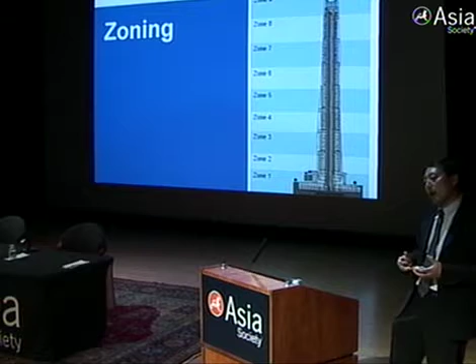So the building is divided into 9 zones. Zone 1 is the lobbies, the hotel functions, the public amenities, retail. Zones 2 to 6 are the office floors, and each zone will have a different kind of floor plate size to fit different tenant needs. Some tenants probably need a big floor plate, ranging from 4,500 square meters down to 2,000 square meters. So we have different conditioned floor plate zones for different tenants.

Zone 7 and zone 8 will be the hotel, with the hotel lobby in the middle. Above will be luxury hotel suites, below will be luxury business hotel suites. The top, zone 9, will be exhibition space and observation space, also containing wind turbines for wind engineering elements.

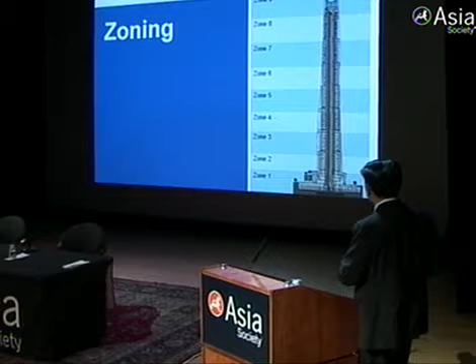So the program includes conference and retail, office, hotel, observation, and boutique offices. We preserve some of the office suites on top as potential exchange space or showcase space for top Chinese companies, as a place for them to engage the world and meet people from around the world, show their business, and make very important relationships. In China, making private relationships, clubs, all that stuff is very important as a business function, but it can also be very public, serving as a company's window engaging with society as well.

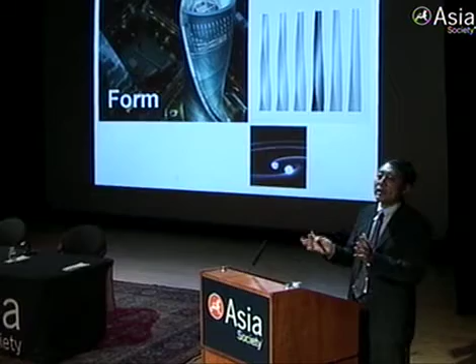Again, go back to the form. I talk about the form we talk about from an urban design context. We said there's three buildings working together. So this building being the very futuristic looking in a spiral. Three buildings together, the building spirals 120 degrees, which is exactly 1/3 of a circle. So it's actually a metaphor about harmonizing three buildings together as a triangle relationship.

But everything works not only as a metaphor, for a symbolic reason, but also for a very important engineering reason. For a tall building like that, wind engineering is the most important thing. And the architecture form needs to work with the force of nature.

It's very important. So we studied the spiral from 90 degrees, 110 degrees, 120 degrees, 130 degrees, 150 degrees, and 180 degrees. In the process, we studied different rotations in the spiral and put them into wind tunnel testing to see how the spiral shape will affect the wind engineering. The result tells us the more spiral helps reduce wind resistance.

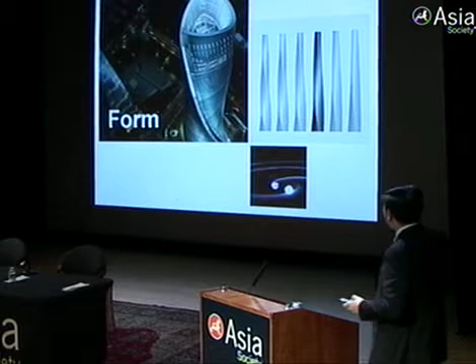So it actually helps our structure system much better, helps my friend Dennis much better here. But also, we want the form itself to make sense with the functional space inside, so it's very efficient, makes the internal space work, and doesn't look like too much movement. So it's a very subtle, elegant shape. Eventually, what we picked is 120 degrees.

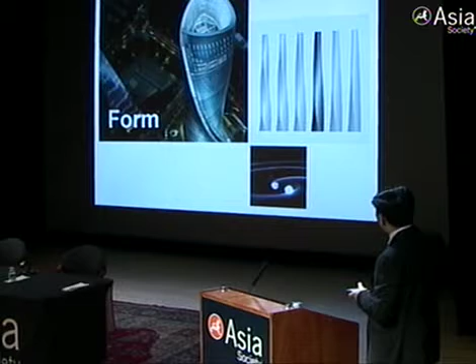We go back to the big story. We said that this form is futuristic because the spiral shape, from the physical standpoint, goes from the smallest things in our nature, the electron, to the biggest thing, our universe. Our existence is surrounded by the spiral nature of a spiral. So that's why we think the form represents the future and nature as well.

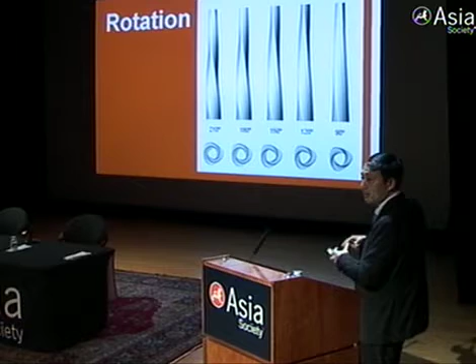So the rotation, 90, 120, 150, 180. So the 120 degree spiral is about 1/3 of a circle. Actually, it completes the three-building-together relationship. We think it works very nicely.

And the other thing we did is scaling. Our curtain wall is a very challenging design because the glass form not only rotates, but also tapers up above. So it tapers and rotates at the same time. We have a very big challenge designing a curtain wall system because the glass needs to be very uniform and also practical to make the glass work.

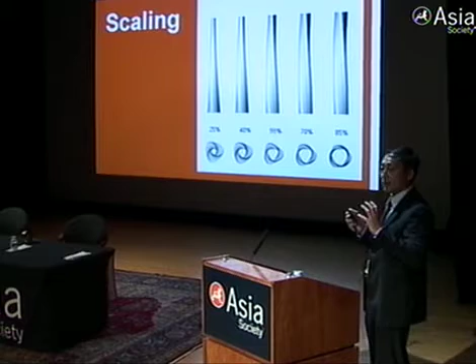Both the spiral rotation and the scaling help the wind engineering. We studied the form with our scaled spiral and rotation shape compared to a regular rectangular tapering box. Let's say if we take a John Hancock building form and project it to 600 meters tall, our form will reduce about 24% of wind resistance from a structural load.

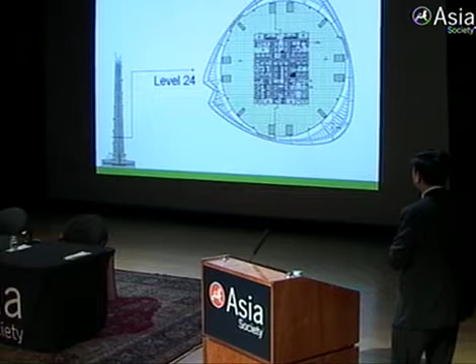The client, although owned by government, was very demanding on us to create a very efficient, great business. So doing a tall building is not only for the aspiration of being tall, but also needs to be efficient as a business. It needs to be a very efficient floor plate. It needs to be good business.

So on the 118th level is our luxury hotel suites. The hotel lobby is on the 110th floor. Down here there will be a spa and restaurants. Here will be our reception lobbies, cafeterias, and the club lounge area.

According to Chinese architecture code, every 15 floors you have to have a refuge area temporarily for people, in case of emergency or fire, to stay while the fire is being dealt with. So every 15 floors we have a sky lobby, and below that a refuge floor, structure floors, and mechanical floors.

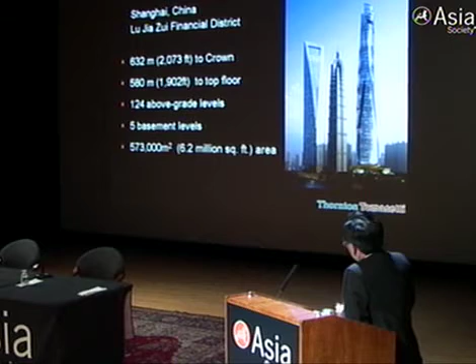With this in mind, you understand this building has a tapering form - how do we make it simple? And the building is twisting, so we can't do formwork twisting. So working with Sergeant and his team for months and months, we came up with tricks and ideas for how to keep the structure simple and fulfill the requirements.

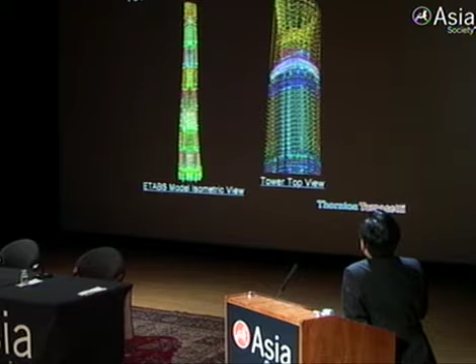I'll go on further to show you another one. Okay, the gravity system - now this is our computer model of the entire structure, including the curtain wall support structure above. Now I'll give you a short movie. We should have some music, right?

You can see that this is the perimeter grid that supports the glass curtain wall, which is hung almost every 14 floors in each zone. We have an atrium space in between each zone, called the sky lobby. And this is the mechanical floor. They have a full triangular plate size that will extend to the full perimeter.

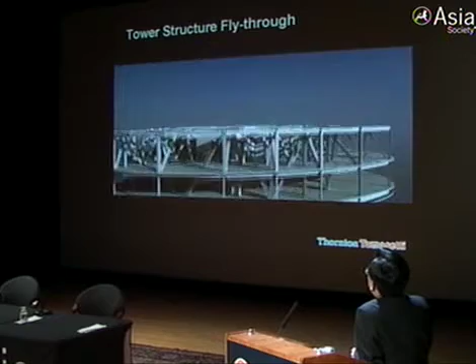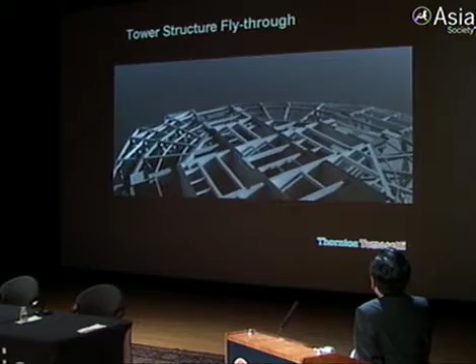The building is a steel building with steel floor framings, steel deck, metal floor, and concrete slab on metal deck. The concrete core... What you don't see is the hanging steel rods coming down from the mechanical floor, 14 stories up and down, to support all this glass curtain wall that forms the atrium space in between.

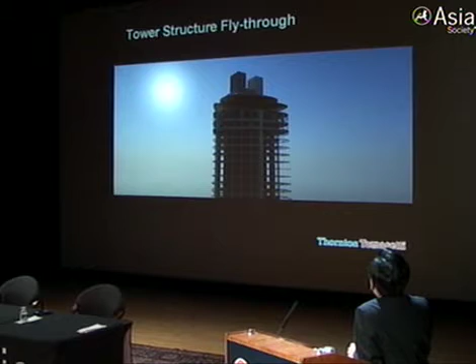The crown is not there yet because we're still making final adjustments.

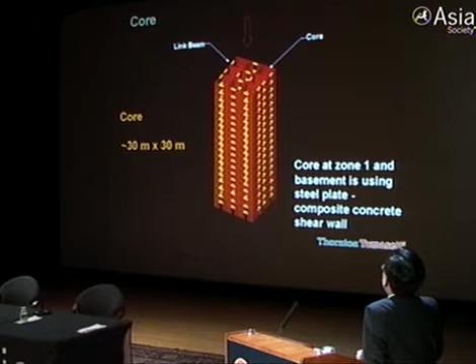So the core is primary composite. Let me jump into it. Basically, the building consists of a main concrete core. The core itself is about 30 meters by 30 meters, which we try to make consistent throughout the building. And we chose this core because we think it's sturdy, very fire resistant, and gives a lot of mass, which gives a lot of stiffness to the building.

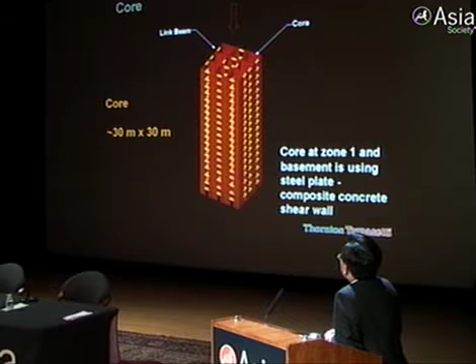In China, labor is cheaper than in the United States, and concrete material is more economical, as part of the owner's requirement to be economical. And it fits well with the construction schedule as well. But inside the core, we have steel columns buried inside, with a lot of rebar buried inside to make it safe.

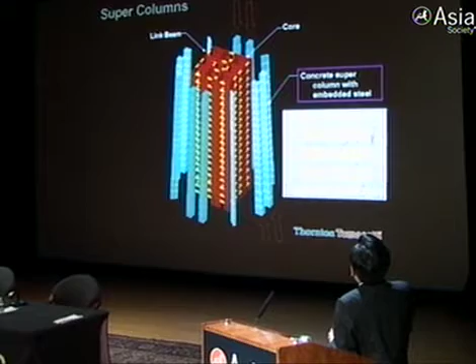Now, outside the core, how do we make it simple? On each side of the core, we have two super columns on each side. So this building, in the east-west direction, we have two super columns and two super columns. In the north-south direction, we also have two super columns. And these are the miscellaneous corner columns.

This super column ranges in size from about 5.5 meters by 3.5 meters at the base to 2.2 meters by 2 meters at the top. This built-up column consists of steel wide flange built-up plates and reinforcement with high-strength concrete. That is also quite labor-intensive, but it's manageable in China because we take advantage of more reasonable labor costs there. It's also quite sturdy and fire-resistant. Look, it's all encased in concrete, so we can eliminate fire risk. It's quite sturdy, so it can take a lot of impact.

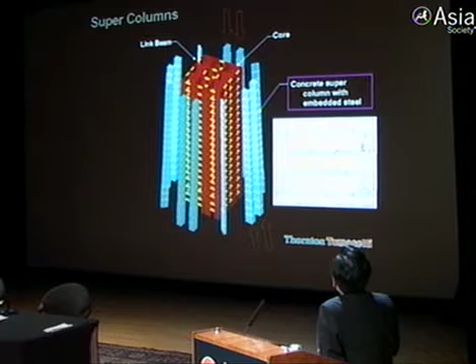Now we have the super column. How do we make the building safe against wind load and earthquakes? The primary system is like skiing. For a low-rise building, we only have the tower core itself, like the trunk of your body, and you can withstand the wind load. But when the building gets up to 2,000 feet tall, the body itself, the 30 meter by 30 meter core, is not stiff enough to withstand this lateral motion.

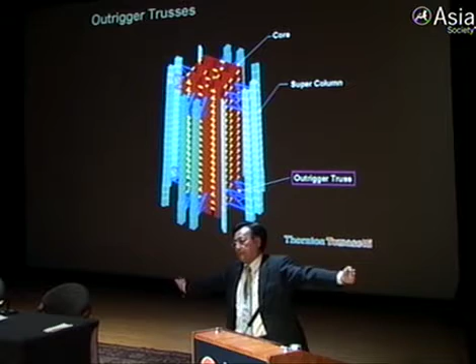So we took the same theory, the phenomenon of a ski pole. We call it an outrigger system. Imagine you're the body; people give you a pair of ski poles, and your hands, stretched out, are your outrigger trusses. When you're holding two super columns on each side, connecting to the core, it gives you more stability from the base. So when you twist like that, the building gains more stability. Can you imagine standing like that? It's less stable. But when you do that with two super columns standing, it will be much more stable.

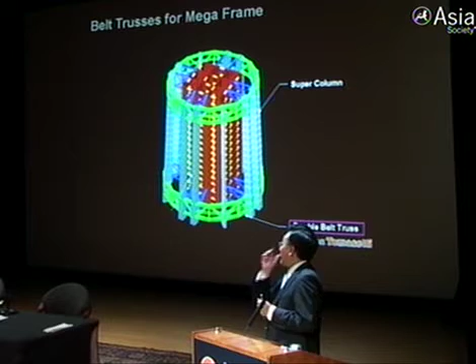This has been quite efficient, but for earthquakes, it's not enough. Because in an earthquake, when the building shakes, we also want ductility, more elasticity. And we also want to have a second system of defense. So the way to do it is we put a ring of belt truss, also two stories deep, in the mechanical floor every 14 stories, and this will form a mega frame.

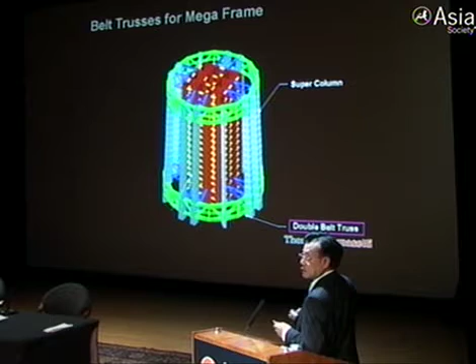The frame is like the legs of your table. Imagine these are the legs of the table, and this is the top of your table, rigidly connected, and you try to push this table. It will give you another rigidity by using this ring. We call this a frame. So together with a frame, we enhance the structural safety of the building. So we can tell the owner, this building is very safe.

Now, we also take advantage of the form to support the curtain wall. Every 14-story zone, we cantilever out some trusses. And these are the trusses from which we start hanging all the steel rods to support the ring on each floor for the curtain wall. We call it the radial truss. So we try to fit in all the components like a Swiss watch to make it work. We call it the radial truss system.

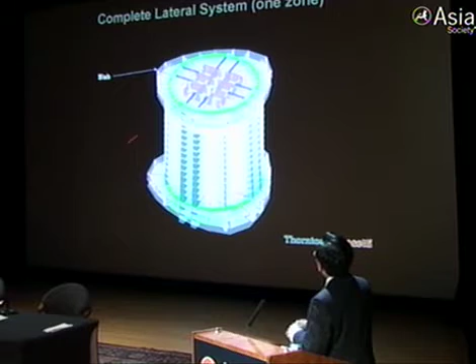Now, this is the composite picture. This is the mechanical floor. We have the outrigger trusses. We have the radial truss. And this is the floor. Don't forget, all the office space remains in a circular shape. The building itself, the outside skin, is a triangular shape. And since we freeze the shape of the tower in a circular form, that allows the architect to have a free form to keep twisting the tower facade to provide the spiral form for this building. This is the outrigger.

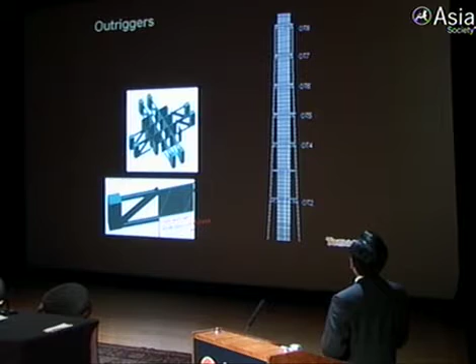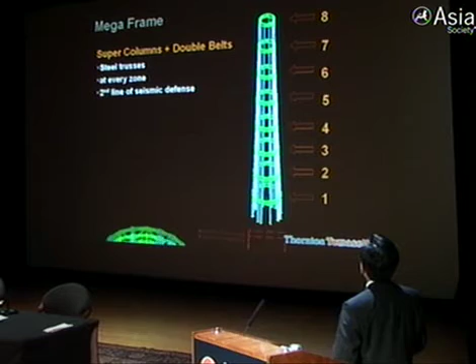Now, I can jump through this very well. There are a lot of complex connection details to connect the super column with the trusses, and these are mega forces. We're talking about hundreds of tons of force into each connection. Now, this is the mega frame, the composite picture. It is a second line of seismic defense. The connections, I have to jump fast. The radial truss.

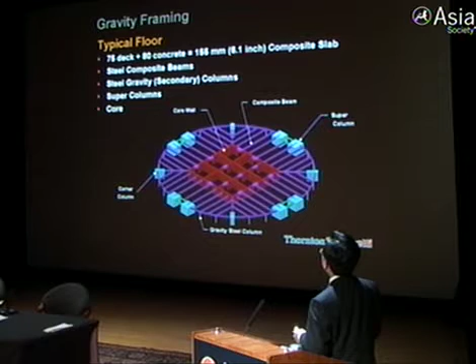Now, the floor framing is very simple. We have to keep it simple so the contractor can keep repeating the same construction process every week per floor. We have a core, which is concrete, very sturdy. They can do it by jump forming. We standardize the formwork so they can keep jumping up. We standardize the size of the super column that's gently sloping up to form the tapering shape. And we have steel floor beams and then a concrete slab on metal deck. They all come prefabricated in dimension and shape, and we keep repeating it for each zone with different dimensions.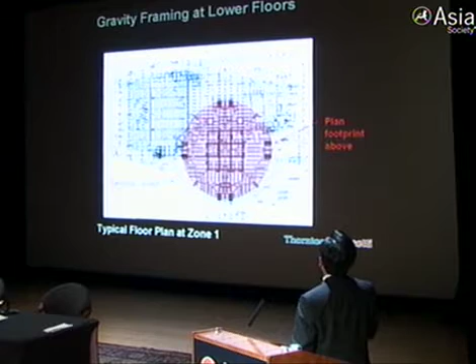This is the footprint. This is the podium space. And we have a seismic joint because when the building starts shaking, we don't want it to shake unsymmetrically with the podium. And we also have a settlement joint, because when this building settles, we don't want uneven settlement. We want it to settle evenly, so if it sinks, it will sink evenly. You see, we are keeping the floor plate in a circular shape, but the architectural feature is a triangular shape. We maintain it constantly up the building with a different diameter as it goes up, and the architect has the freedom to express itself.

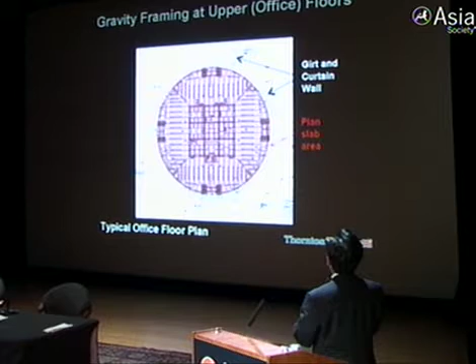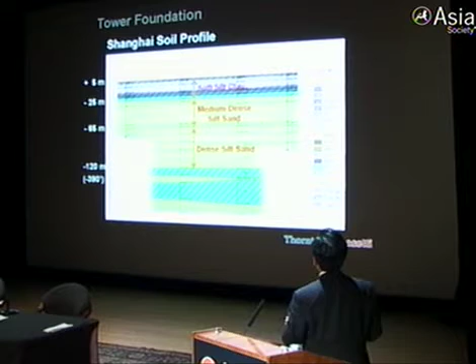Now, talking about the soil, going down, the foundation consists of piles. The length of each pile is almost 250 feet from the ground. We are driving piles all the way down to this dense silty sand layer with a total length of 70 to 80 meters, which is about 250 feet. We also have a slurry wall close to 1.2 meters thick. We have about 955 1-meter diameter piles underneath the tower, and about 1,800 cast-in-place bored piles, 1 meter or 700 millimeter diameter, underneath the podium. In total, we have almost 3,000 piles to support this tower.

Now, this is the mat foundation itself. We have a tower mat supporting all the piles. Each dot is a pile. There's a slurry wall. We have 5 levels of basement, which is 25 meters below ground. And since the water table is so high, we're talking about 5,000 pounds per square foot of hydrostatic uplift pressure pressing against the slab of the last basement.

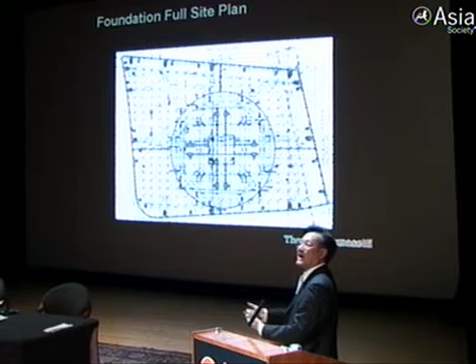So how do we prevent the slab from bulging upward? We're using a lot of small 700 millimeter anchor piles to anchor the slab back to the soil so it won't heave up. And for the tower, we don't have this uplift problem because the tower itself is tall and has enough mass to counteract the buoyancy.

Now, we also try to use these fin walls and outrigger walls to distribute the entire weight of the building evenly to this mat foundation, in order to distribute the load to the piles, so the building will have even settlement. So the mat foundation is about 20 foot thick below the pile. Just to give you the order of magnitude of the massive scale of this project. And we are also using high-strength concrete as well.

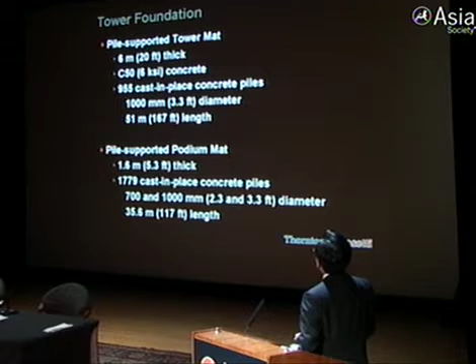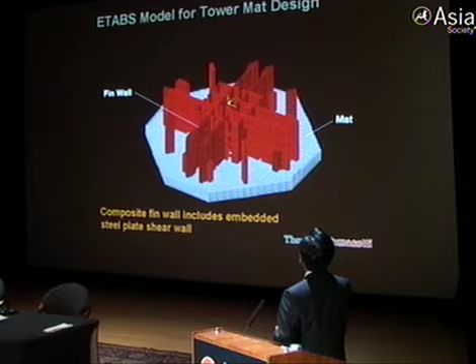Foundation, to give you some close-up. And this is the fin wall in the basement. We did a lot of computer simulation and hand calculation as well. Well, these are the loadings we designed for different kinds of loading. This is a wind tunnel test. The building has a special shape.

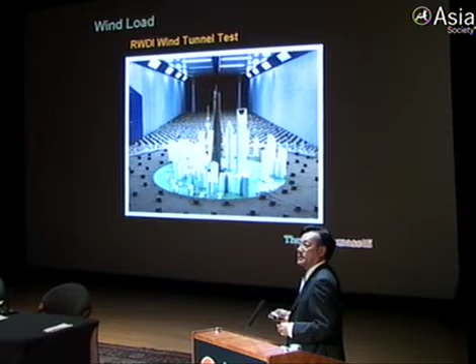Not only do we do regular wind tunnel tests like other tall buildings, we even spent hundreds of thousands of dollars to do a special wind tunnel test similar to the one they use for rockets and missiles in Canada. And this is how careful we have been engineering this building to ensure the safety. It's designed for a 100-year storm for strength; it's also designed for stiffness for a 50-year storm.

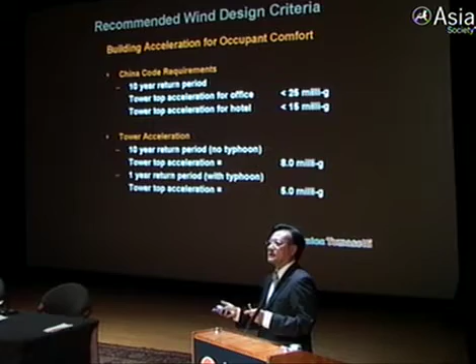Also, when the building is so tall, people will feel motion sickness. And different people have different perceptions of building motion. It is so-called acceleration. People always say, is the building moving very fast? No. It is not the velocity of the movement that makes you sick. It's the acceleration that will make you uncomfortable. Just like when you're sitting in an airplane, when the airplane is accelerating from 0 to 100 miles per hour or 300 miles per hour, you feel the jerk and the acceleration.

When the plane is traveling at 600 miles per hour at 30,000 feet, you don't feel anything because the plane achieved a constant velocity already and you don't feel the acceleration. You are sitting comfortably drinking your martini. Now, but the building, you will feel it. If the building is moving, you feel the movement because you feel the building acceleration. And there's a guideline for that. And when you are sleeping in the hotel at the top of the building, the guideline for acceleration comfort level is even more stringent.

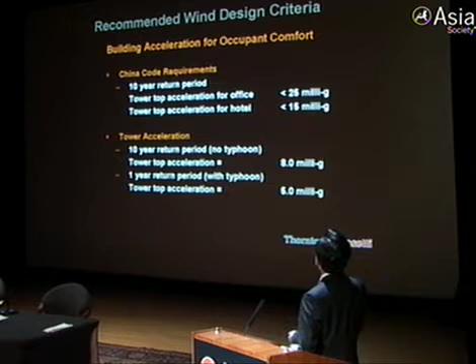It's approximately 15 milli-g. And for office, while you're working all the time, you don't feel the motion sickness that easily. That will allow you to have 25 milli-g. G is gravity acceleration. Okay. In our building, because of our great design, we can achieve only 8 milli-g versus the 25 milli-g. So we passed that comfort level. And even with typhoon, we only have 5 milli-g versus the 15. So we can tell the owner that the design is quite efficient and achieves what they're looking for.

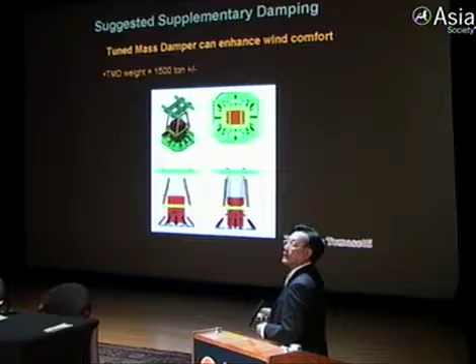Well, the owner said, no, it's not enough. We want it to be very, very safe, so that even people who are very sensitive to motion will not get sick. So, working with the tuned mass damper, we have added a pendulum, which weighs about 1,500 tons, at the top of the building, working as a swing. This thing is going to swing when the building is activated. So when the building moves to the left, this will swing to the other side to counteract the movement, in order to slow down the building, reduce the deflection, and enhance the comfort level.

It's a tuned mass damper. Just imagine you are sitting on a swing in the garden. You can swing your legs up, swing your legs down. That's how you achieve the motion. It's a similar theory. When you want to slow down, you swing your legs in the opposite direction of the motion. That's how you slow it down. It is working in a similar fashion.

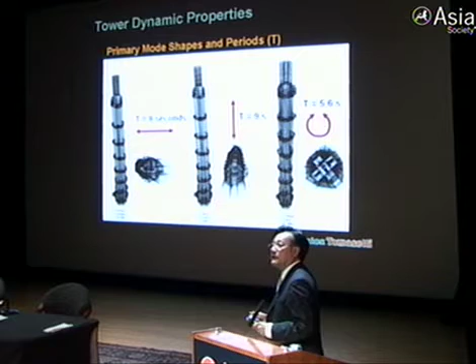Well, we talked about the wind load. The building does have a natural period; it reacts to wind. It's a natural frequency. For this building, the building is symmetrical. It's very important. We have a very symmetrical building. It has a structural behavior that's symmetrical in both directions, the x-axis and the y-axis. So it's about 9 seconds in the x-axis, and also approximately the same 9 seconds in the other direction. We also have torsion. The deflection of the building under wind is quite uniform.

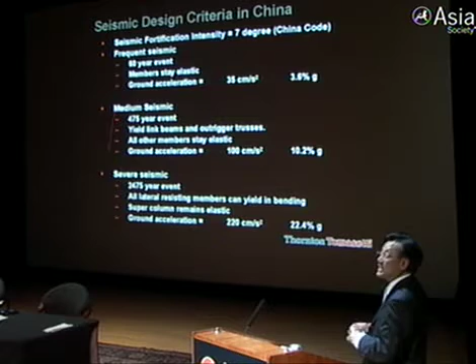We also have a design for seismic. We have small seismic events, which recur every 60 years, okay? You also have to design for a medium earthquake that happens almost every 500 years. And for this building, for the building code there, to make it ultra safe, we have to design for a seismic event every 2,500 years. So I will move there if there's an earthquake.

And not only that, they want to ensure that all lateral members can yield only in bending, but will not break. It will still be standing up. It will not be overstressed. So these are the requirements for earthquake.

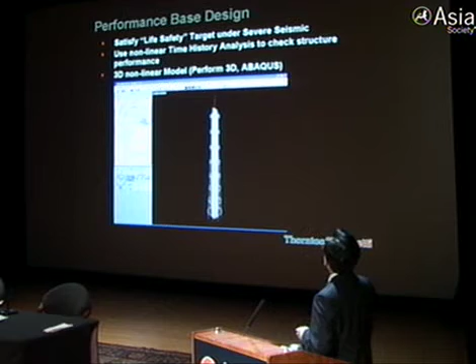And we have done nonlinear dynamic analysis with different seismic curves. We have taken 7 seismic curves around the world, and each curve consists of X-Y axis direction that include the San Fernando earthquake and the Mexico City earthquake and a bunch of earthquakes. We went through more than 132 earthquake history experience and put it into our building to prove that it works.

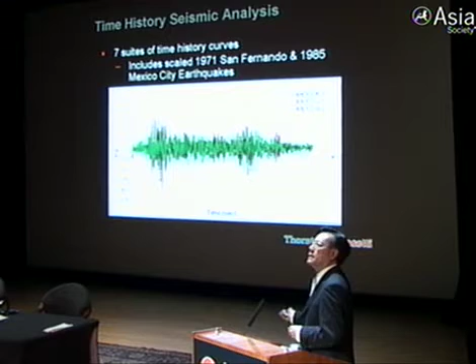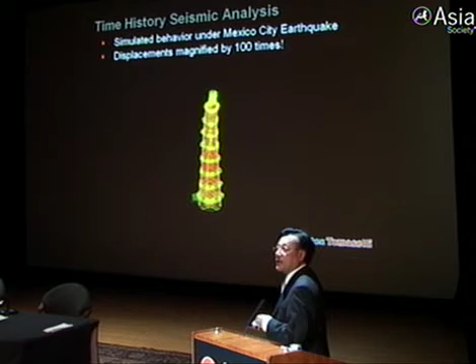This is the simulation of earthquake. It has been magnified by 100 times, but don't be scared by that, just to show you how earthquake will work. I should not show it to the owner because it will scare him. Okay? But this is how a building behaves in real life. But you have to look at it with a microscope. The building deflection on the top is only about 2 to 3 feet for the highest wind load. So this building is very stiff.

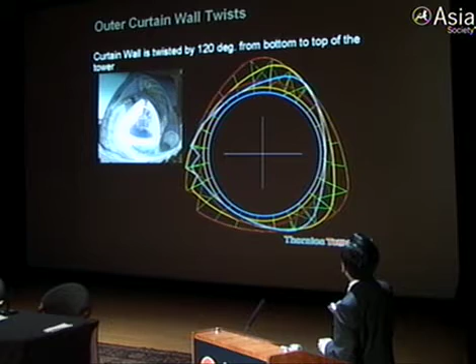All right, the crown, again, we have a beautiful crown for the architectural features. It's almost like 30 stories deep. And curtain wall, again, as said, is twisting. You can see the building is twisting as it moves because you can see the notches themselves change shape. But we maintain simple construction with a circular building floor plate. It's a beautiful design.

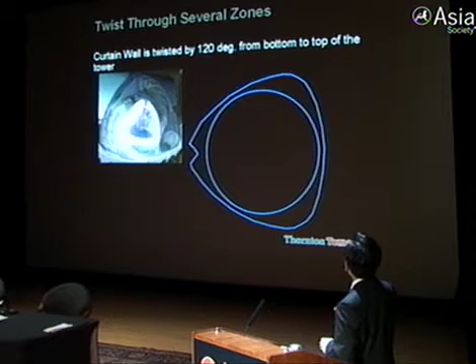And you can see the curtain wall. Again, the building is twisting, but the building floor plate is not twisting. That is the trick. And we are hanging all these steel rods, 14 stories, to support the weight of the curtain wall, brought back to the outrigger truss and the fin truss, and that creates all this exciting atrium space. And this is a simulation of all that.

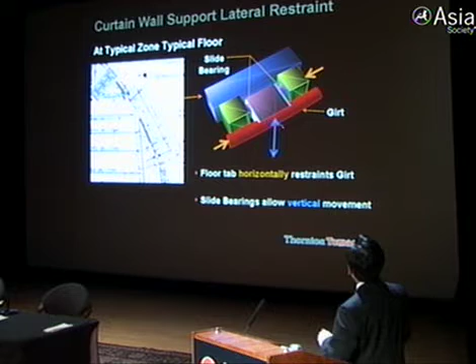And even when we detail all this curtain wall, we have slipping joints, slide bearings, all kinds of mechanisms to make it work. The crown itself is also a very challenging cantilever itself. So thank you so much.

Okay, so very quickly. The MEP engineers are usually the unsung partners in most projects, but I know that everybody today is much more interested in green design, high-performance design. So I'm particularly pleased that tonight we can also represent MEP engineering on this project with Doug Mass, who is the president of Cosentini Associates and the principal in charge of this project.

Doug has over 30 years of experience working on MEP engineering projects across the United States and obviously internationally as well. I know that all of you are familiar with 4 Times Square, which was the pioneering green skyscraper in New York. And Doug has also been in charge of the Battery Park City projects, such as the Solaire, which was the first residential green building in the U.S., down in Battery Park City in our territory.

So I just want to share with you an observation that although lip service is always given by the architects and engineers to the team, if you were sitting down here with me while the 3 of them are chuckling about the project, you'd know that the real camaraderie develops out of projects such as this. So the third of the 3 amigos here.

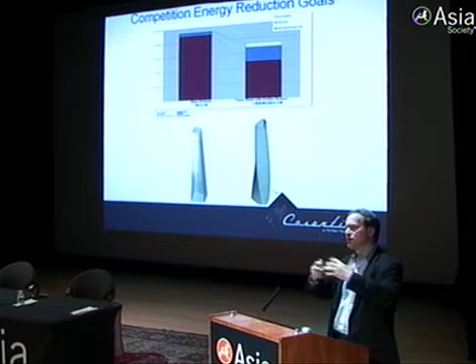One is using this outer skin—I call it the triple glaze. And the second is the concept of trigeneration, an electrical on-site utility that can make electricity, and we use the waste heat in the wintertime to heat and in the summer to cool.

By doing that, we were able to establish a goal. And I'm proud to say that through a lot of hard work among everybody, we are very close to that goal. We're about 24% lower than the code, which is quite an achievement, because typically in a competition you promise a lot, but you don't usually get the opportunity to deliver it. In this case, I'd say we're about 85% of where we thought we'd be, which is quite amazing.

In terms of the energy efficiency measures that we took, lighting controls are very important, but the central plant, HVAC, and the envelope were the big contributors to the energy reduction in this building. And we used a number of techniques, which I think are very important.

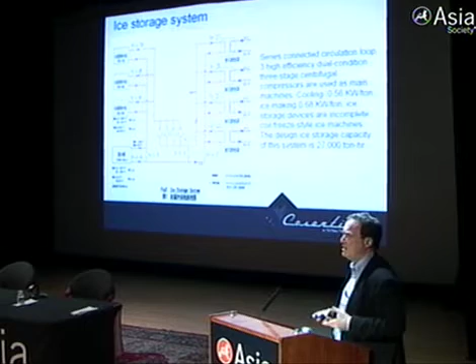First is ice storage systems, and what that means is part of sustainable design is to minimize the resources from the utilities. Remember, this is the three siblings in this area. Can you imagine? You probably have 12 million square feet of office space in a tiny little location. You want to reduce the size of the electrical service coming there and the water. So we try to maximize the efficiency of the building.

So what we did is we put a 27,000-ton ice storage system, and basically what that meant is at nighttime, when the cooling load's reduced, we run the chillers. We have dual-duty chillers, actually. We run them for normal temperatures during the day. At night, we make ice. We store it in tanks, and we use that during the day, which reduces the electrical demand.

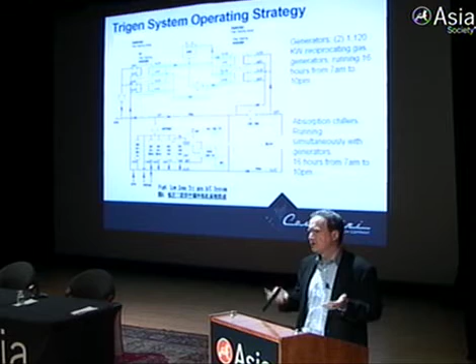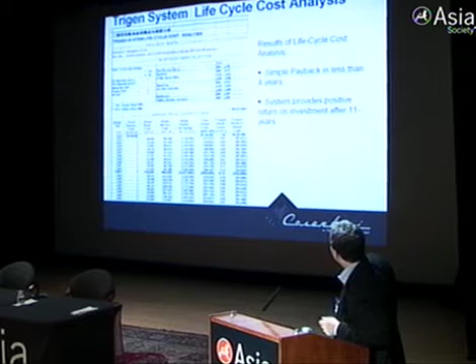Tri-gen operating system, I mean this very simply: we have generators that make electricity, and then we use cooling or heating in the different modes. Originally we had a much bigger tri-gen plant when we had more residential, but as the residential load reduced, the day-night balance changed. We actually studied this ad nauseum. In fact, Chris ran all the studies on this, and we probably did 25 different tri-gen studies to get down to a simple payback of less than 4 years, based on our return of investment in 11 years.

So this, as Dennis said, these buildings are studied in detail, and we wanted to not just put a cogen, a tri-gen plant in to demonstrate something, but one that really makes sense, makes economic sense.

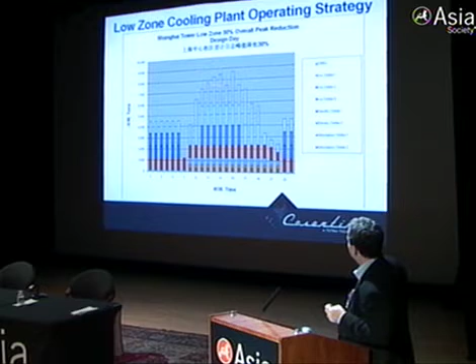The result of what I've mentioned to you in terms of the skin of the building, the ice storage, and the cogeneration allowed us to reduce a peak reduction of 30% of the installed load. So our chiller plants, all of the main utilities are 30% less than a Class A building would have been, and that was very important. It contributed. If you saw some of the diagrams that June had about greenhouse gas, we're using less greenhouse gas in this building as well by reduced demand and reduced consumption.

We also have other requirements. China 3-star requires a geothermal system, and again, it's a relatively small geothermal system, but we put this in the building, and it's going to be serving some of the retail areas down below.

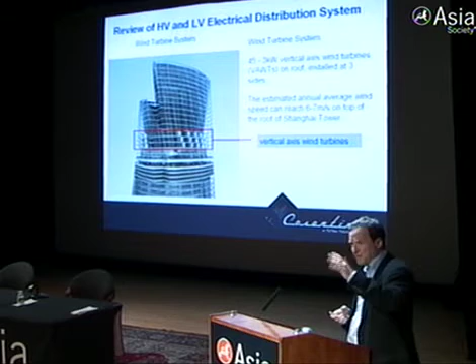Wind turbines. I think Dennis or June mentioned we have maybe 6 to 7 meters per second velocity, about 1,200 to 1,400 feet per minute. We have 150 kW of vertical axis wind turbines, and we're actually trying to fit more in there now, which will take care of the lighting and some of the other power requirements.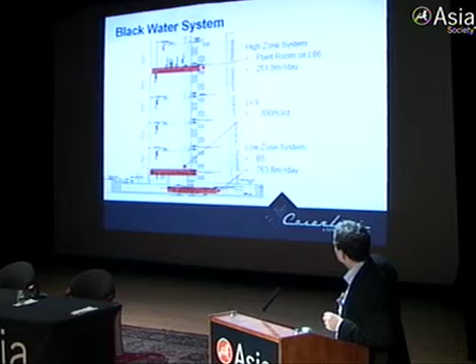Blackwater system. Again, if you have water, you might as well use it as many times as you can before you discharge it. This gives you an idea that we're putting some blackwater systems to collect water from the hotel. We're going to process it on site, and we're going to use it for toilet flushing. So every element that we can reuse, we're trying to reuse and recycle.

And I think between the blackwater and this, there should be a stormwater collection. Again, we don't have a big high roof, but we do have the high roof and the plaza. We capture that water, and you saw the diagram where we're saving the amount of water equal to 5 times the largest lake in Shanghai. So it saves a lot of water in the building as well.

The location of the central plants. Again, we try to make it very simple. Going back to what Dennis and June talked about, there really is nothing very complicated about the building other than the size. It's basic engineering principles we're using, and I think it's a lot of common sense.

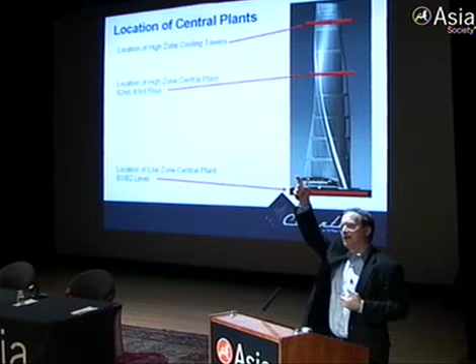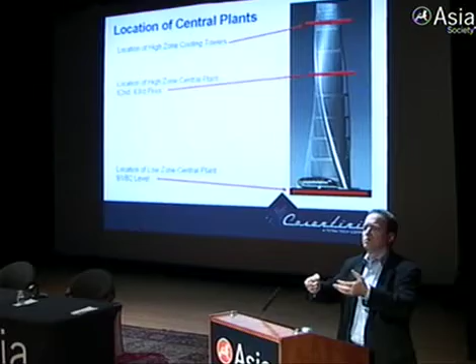We have a central plant, cooling and heating plant in the basement, and we have another cooling plant on the 82nd, 83rd floor. Why are we doing this? Because of the pressures. If we put one plant on the top of the building, the hydrostatic pressure would be such that we can't buy local equipment and we can't maintain it. This is the kind of building where in the future, if somebody puts a fan coil in or a water element in, we're not going to be concerned that there'll be a water break because the pressures are low.

Again, this is to demonstrate that every 15 floors I have basically a pressure break. So it's a very low pressure system in the building.

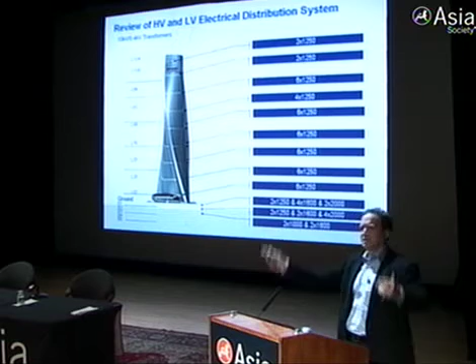Electrical, again from the electrical distribution system, it's a horizontal utility tilted up on its end. We run high voltage up the building, and we transform locally.

So the transport energy, when you think of heating and cooling, we all think of refrigeration and the boilers, but the fan systems are running all the time. We want that transport energy to be extremely low, and if you look at ASHRAE and LEED, they talk about this, because we have these 15-story buildings that we're stacking. Electricity-wise, I have switch stations up the building, and a number of distributed transformers throughout the building.

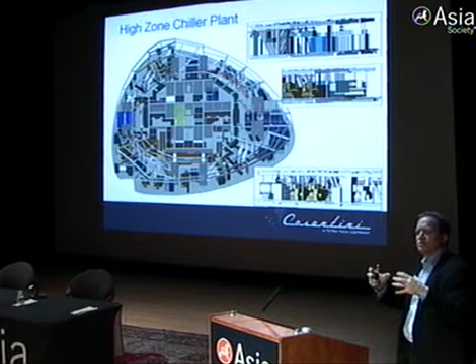Again, you saw that very simple structural scheme that Dennis did for these belt trusses, which we're still working on. We're getting a laugh here from my guys - they aren't going to be laughing, but when we tried to fit our equipment into these zones, we had to do this in 3D modeling in Revit. We have fly-throughs of all the machine rooms, which I'm not going to show you now, but to show you the complexity of how you fit the elements in here.

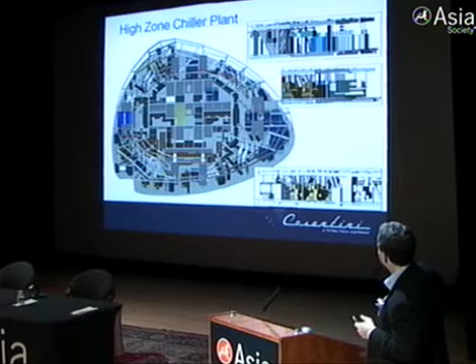We have various zones of mechanical equipment, and we ran sections - this is a tool that allows the contractors to understand the plans. If you look at the plan, it's a 2D plan, and you see the equipment sitting there and say everything should fit, but once you look in 3D, you understand they're huge trusses. I think some of the cross braces are 3 meters deep.

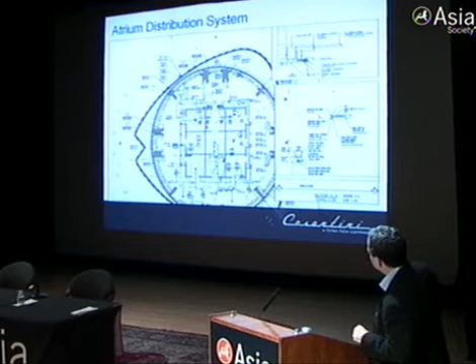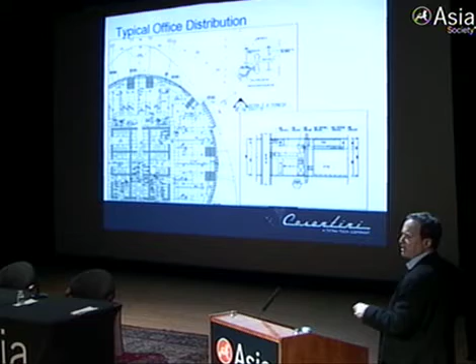Air distribution system, again, key to the job, because we have a lot of office space. We have our very simple office space in the circular position, with a skin system on it, and a second skin on the outside - that's my buffer zone that I use in the space. This is just another example of office distribution. If you look at the floor plans, everything's very, very simple - very simple to build and to operate.

Within this atrium space, we wanted to make sure we had enough comfort, and if you're in the higher floor within a 15-story stack, you wanted to make sure you have enough cooling to offset the heat stack. So what we did is run CFD modeling in the atria to determine the temperatures in the space, so people can be comfortable and we can predict what the temperatures will be.

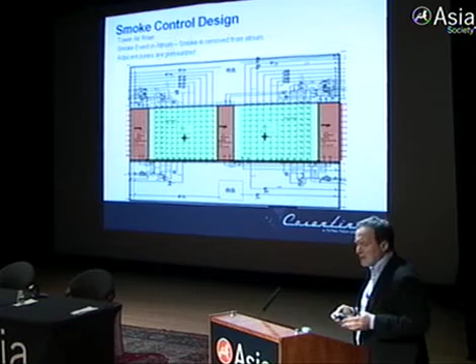I want to jump to something extremely important. You have a huge building, 5 million square feet, thousands of people, thousands of different systems and points - how do you monitor all that? Traditionally in the U.S., we've been talking about having an integrated building management system, a security system, a fire alarm system - a topic called IBMS, Integrated Building Management Systems, utilizing Internet Protocol.

We have a telecommunication system, security, the BMS itself, which is what we call the temperature controls - the Johnson controls and Honeywell - fire alarm systems, information networking, building management, building automation, hotel management, cashiering, all coming on the same platform. And you may say, well, why are we doing this?

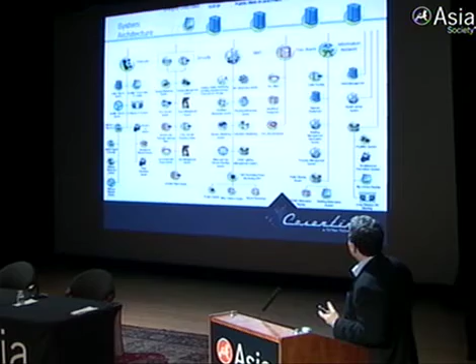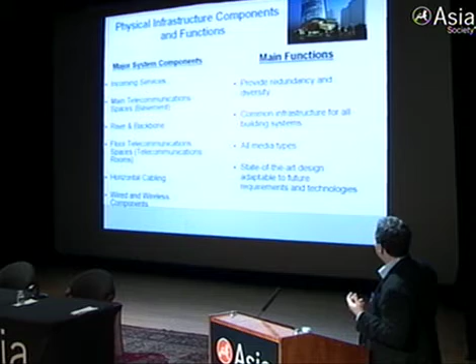We understand that we're doing this from the standpoint of managing this, and that is because technology is going to continue to change in the future. What we've done here is we've said there's two things that we have a responsibility for. One is making sure that we build a robust infrastructure. Cabling comes in, we have to have vertical highways, horizontal highways, redundancy, diversity, so that in 5 years when this building is completed, or 6 years when technology changes, that the infrastructure is in place.

That's number one. Number two, staying on the IP protocol, we can have multiple manufacturers in non-proprietary systems that can achieve the goals of lower energy consumption, lower operating costs, and more responsive property management. That really ties to two basic theories. One is we want to access information, know what's going on, analyze it, and act. The acting part is what really hasn't happened in many high-rise buildings. We get the information, we analyze it, but there's no one source to act on this. That's what the IBMS, I think, will bring to bear.

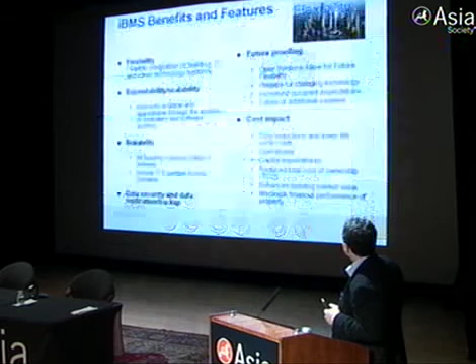And the other feature, I think this is the important one, is future-proofing. We don't know what systems are going to be in the future, we don't know what technology is going to be, but as long as we create this highway, vertical and horizontal, with the latest technologies, then we'll be safe in the future.

That is the end, thank you. I just wanted to stay within time.